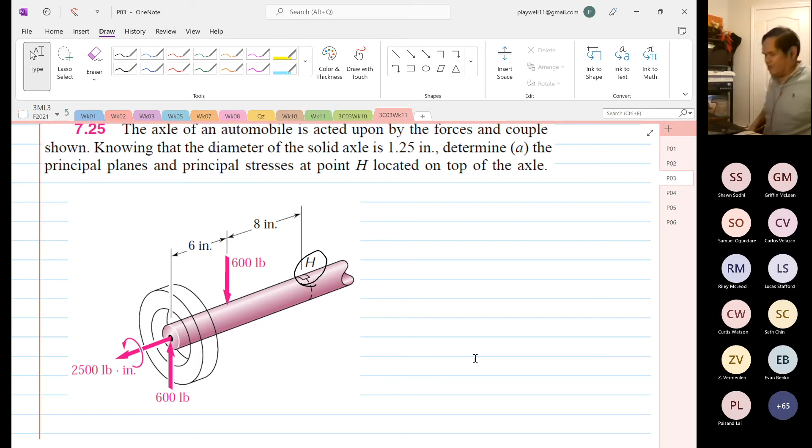Anyway, let's have some more fun on Mohr's circle. Right. So the objective over here is to determine, now this is real life, okay? You see the load already, okay? We are going to determine the optimum orientation of the carbon fiber.

Sorry, are you wrapping this in carbon fiber or is it made out of carbon fiber? You usually wrap things in carbon fiber. You don't make things from carbon fiber. I mean, there's some structure that you could, but for a shaft, you usually don't. You usually find something that's lightweight, that's weak, and you reinforce with carbon fiber, right? Griffin, does that make sense to you? Yeah, I'm on board. Okay, so that's why you see a lot of things where people wrap carbon fiber around things. There's a basic core in there, an inner layer, and this inner layer can be made of very weak and lightweight material, and you just reinforce with carbon fiber.

When you say wrap with carbon fiber, do you mean infuse it with the material, or are you just gonna use some adhesive? Adhesive. Wouldn't then the material be limited to the strength of the adhesive, not the carbon fiber itself? Yes, it does. Shawn, if you were to see the video that I showed last week, it's also important regarding the epoxy. The binder is also critical. But for this to work effectively, you still have to lay it on the principal stress direction. So we are going to determine the optimum orientation of the carbon fiber.

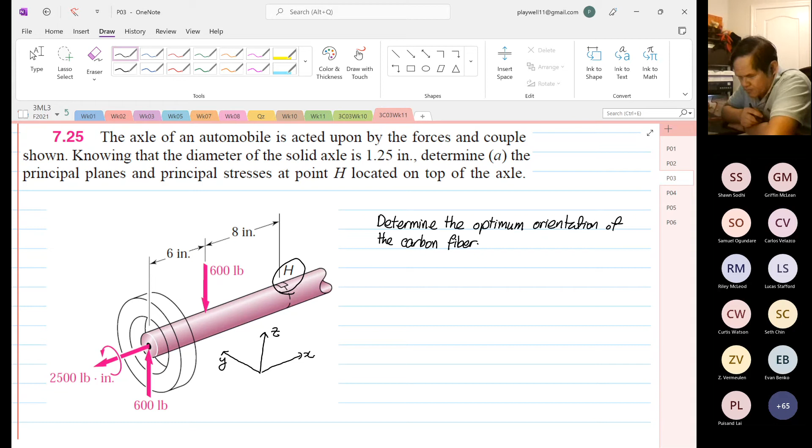So now I'm going to draw our transformation. I'm going to call this my X, this is my Y, and this is my Z. So later on, when I draw a certain view of the shaft, you will know how we are looking at it. Right. So for this case, the shaft will be reinforced with carbon fiber reinforced plastic.

So we have to find the optimum angle such that there is no shear stress acting on the carbon fiber. So basically we have to orientate it at the principal plane. So for this case, we are going to make an assumption. We know that point H is the critical point.

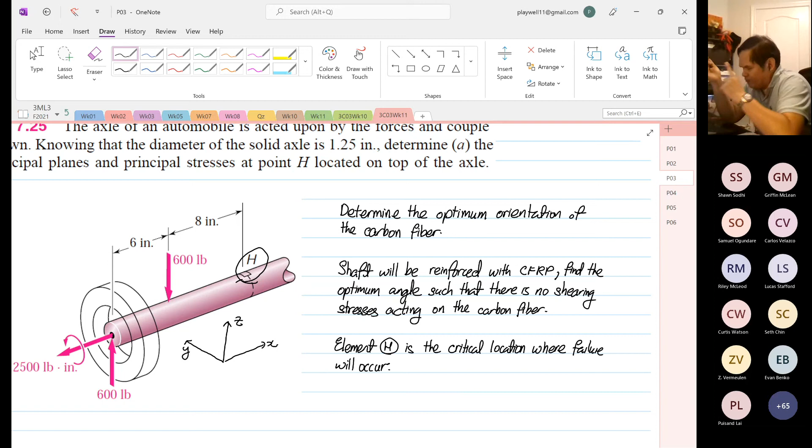I mean, now you have finite element, so it's not necessarily time consuming, but it's expensive. So why will point H fail? For example, point H is where we locate our ball bearing, and that's where failure will occur. So the problem with this question is this. Now I'm going to draw element H and the orientation. This is X and this is Y. And now we're going to draw our element.

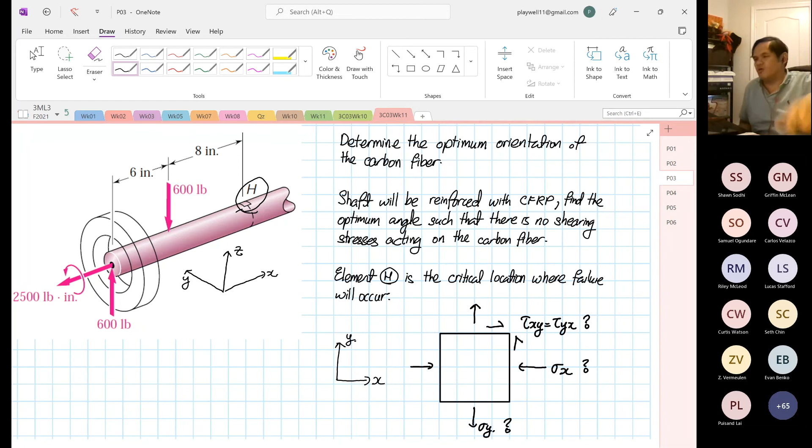Now the problem is this. Stress X, this is just an example. Stress Y. Shear XY is equal to shear YX. We have not a clue what all these values are, not like before, 100 megapascal, 60 megapascal, 30 megapascal. We have nothing of that sort. The only thing that we have is the torque. You see this rotation over here, you have a torque. Over here, you have a point load, and over here, you also have a point load. So this is a real engineering problem, like an actual loading situation.

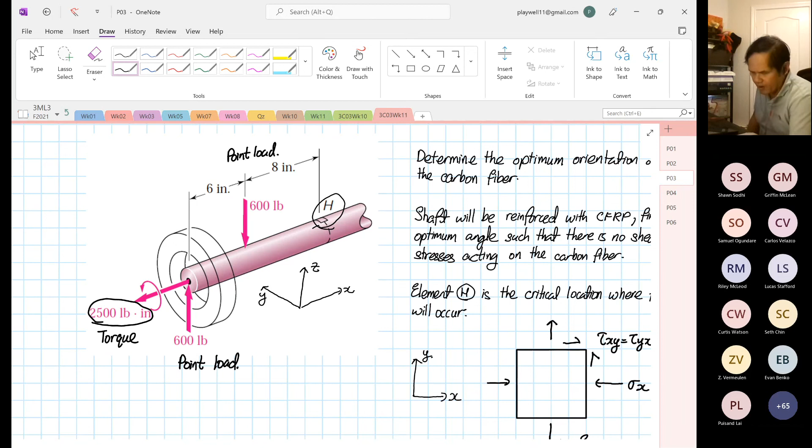So now, in carbon fiber, it gets more difficult because we need to know the orientation. If it's made of just pure metal, the orientation is not important. For us, it is critical. Right. So the first thing we're going to do is find the normal stresses.

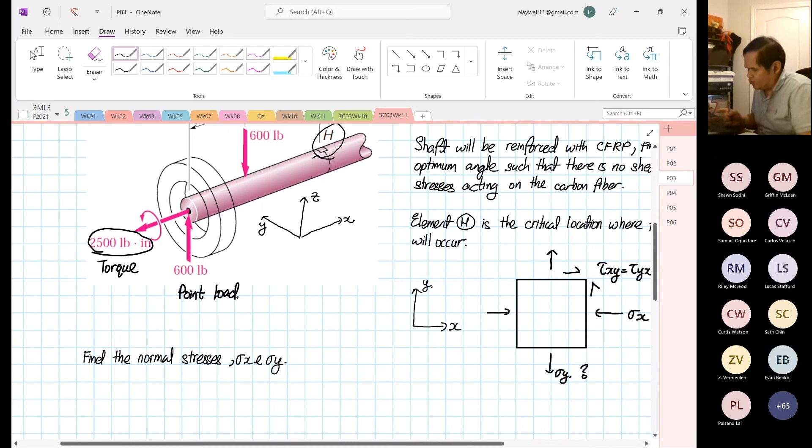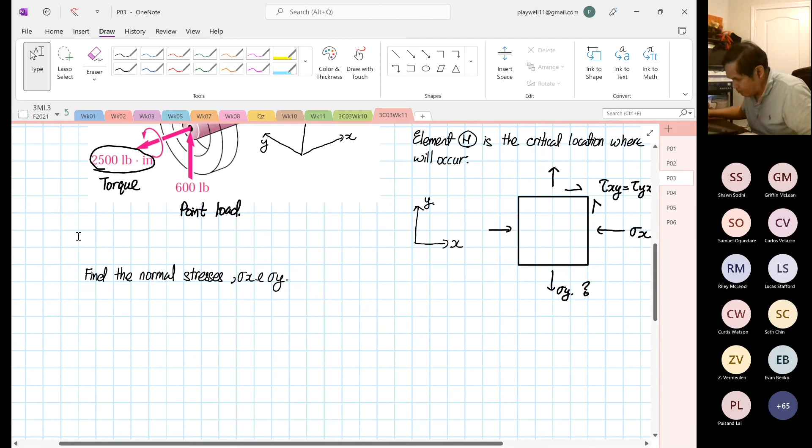Okay, stress X and stress Y. Okay, so now I'm going to view. As I said, you can download these images on Avenue to Learn. So now I'm going to copy, if I can find my cursor. Sorry. I'm going to make this small, so you can still have a view of it.

Right. So this is now my X, Y, and this is our Z. So now I'm going to view this on my YZ plane. Okay, so I'm going to draw now. Sorry, we are going to look at the XZ plane. Okay, so this is our rotation of the Y. So when we view that, this is what we see.

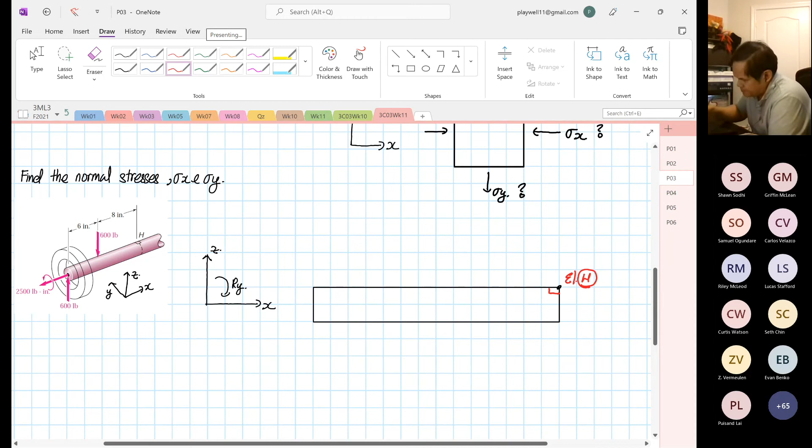So this is the shaft. 2, 2, 6, and then 8. Okay, so this is our shaft. And this is where, over here, not over there, we have our element H. This is our element H. And if we were to look at our loading, this is going up at 600 pounds. This is coming back down at 600 pounds.

And for this structure to be under stress, it has to be fixed. Why? It has to be fixed for the structure to see any stress. Why do I say that? If the shaft is rotating, when will it fail? It will only fail if all of a sudden you resist the motion. Yes or no? You all agree?

So, for example, if I'm going to jump from the 5th floor of the building, when will I die? So I take a leap of faith, I jump, I hit the 5th, then I go down to the 4th. I'm still alive. 3rd, I'm still alive. 2nd, I'm still alive. When I hit the 1st floor, I die. Any idea why I die on the 1st floor? Some of you might say, what a stupid question. Anyone can explain to me?

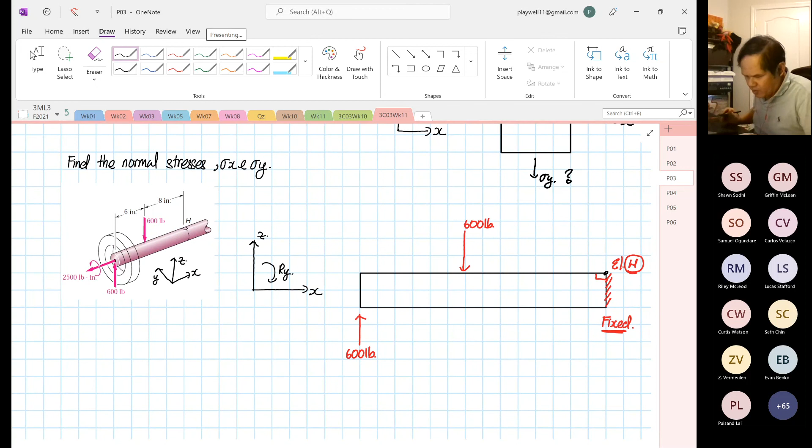So we want to find how the stresses are acting on element H. One thing I want to highlight: we are going to find the moment, the bending moment. So what do I mean by moment? Let's look at the formula. Moment is equal to force multiplied by perpendicular distance.

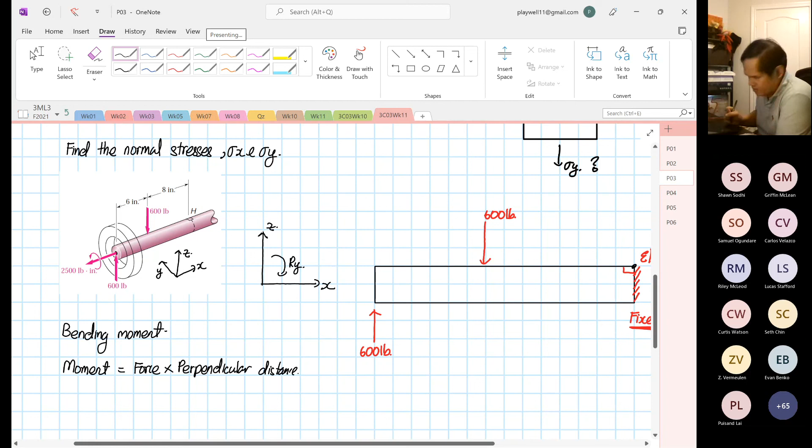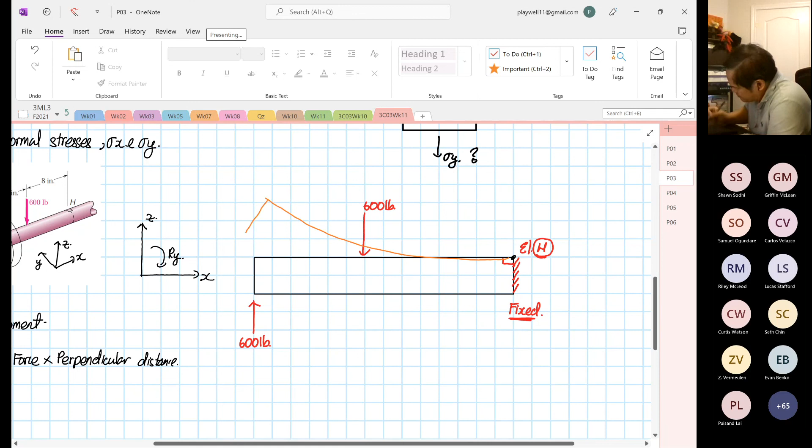Okay, so now if we look at the moment down here, we're going to make an assumption. What is this assumption? If we were to guess how this structure will deform, the structure will deform in this direction. Undo. The structure will deform in this. This is just a guess. So this is what we call our deformation pattern.

Right. So when the structure is bent this way, it means the moment is going this way. So this is moment about Y. So the counter moment at element H will go this way. This is moment about the y-axis at point H. So we have just applied Newton's third law, action equal to reaction, same in magnitude, different in direction. So over here, this is our moment vector.

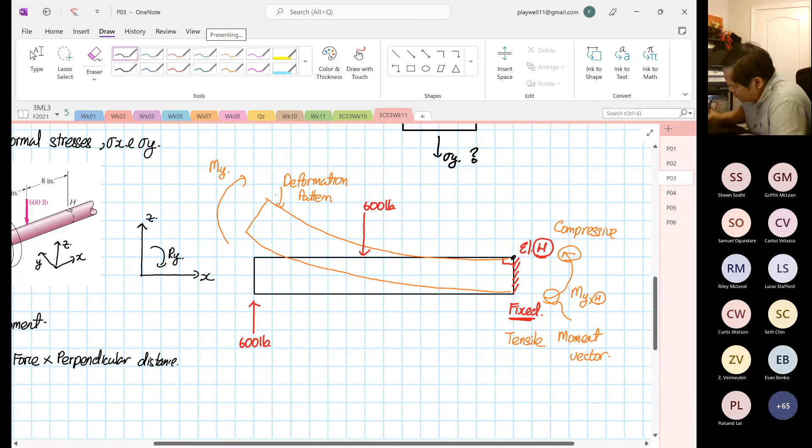The head of the moment vector will always induce compressive stress. The tail end of the moment vector will always induce tensile stress. And you can see over here at the top, you have compression because the circumference